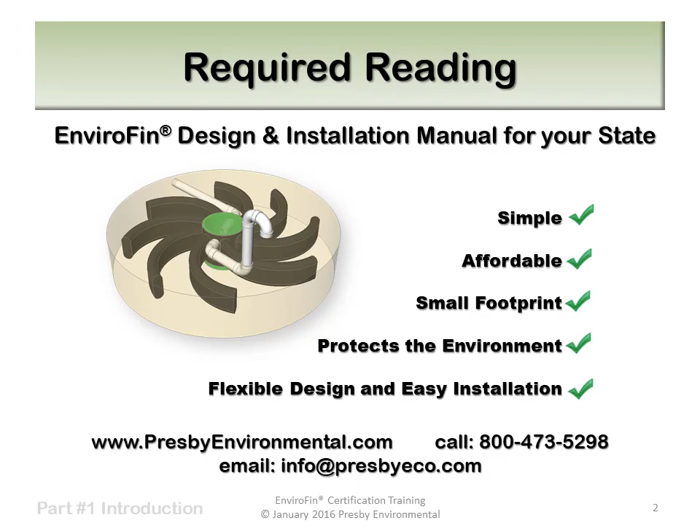Certification topics are divided into 4 parts. The first is a general introduction to EnviroFin. Then we'll investigate the bed configurations available to the designer, which include both rectangular and circular layouts. Next, we'll look at how EnviroFin can be configured in multiple levels for very difficult sites, and we'll finish by describing how to properly assemble and install EnviroFin beds.

Let's start with the introduction.

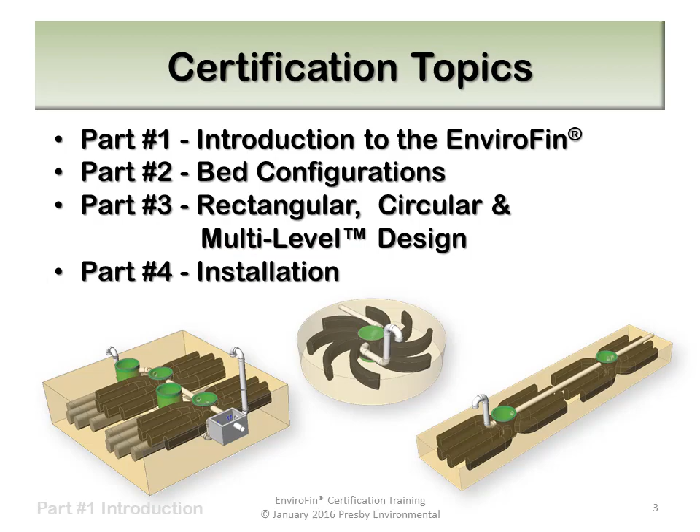EnviroFin is a continuation in the evolution of Presby wastewater treatment products and uses new methods for treatment and dispersal. Wastewater is delivered to a central distribution unit, which allows the surrounding treatment fins to accept, process, and disperse effluent to the surrounding system sand.

EnviroFin has been certified to the rigorous testing standards of NSF 40 Class 1. This proves EnviroFin will treat wastewater to the same or higher treatment levels of mechanical devices, while requiring no pumps or costly maintenance contracts.

EnviroFin may be used in both residential and commercial applications. For higher strength wastewater, contact Presby Environmental's technical support for sizing recommendations.

Like the EnviroSeptic family of systems, EnviroFin offers many flexible configurations to deal with site-specific issues. You'll find EnviroFin's footprint to be the smallest of the Presby treatment products. It also offers the same ease of installation you've come to expect from Presby systems. All this should mean less cost to the user without ever sacrificing the environment.

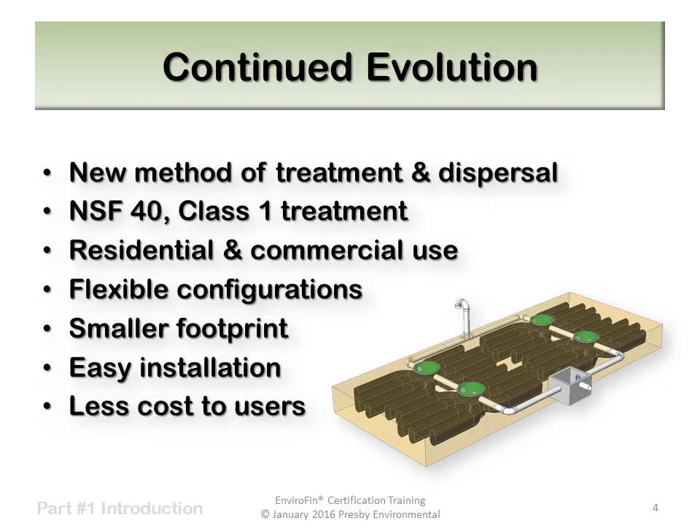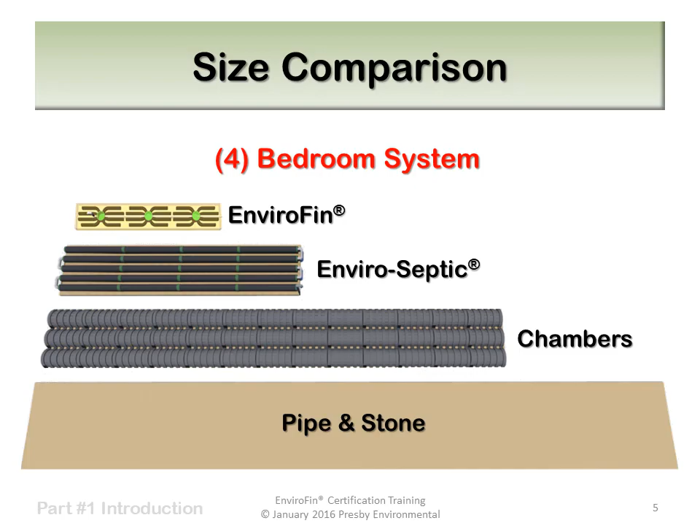A quick size comparison shows EnviroFin to be configured in a very compact footprint. It provides the most efficient use of sandbed area, being approximately 50% the size of EnviroSeptic beds, and as small as 1/10 the size of a traditional pipe and stone system. All this while providing the same level of wastewater treatment as the full-sized EnviroSeptic fields.

Like all Presby systems, EnviroFin is designed to accept pre-treated wastewater from an adequately sized septic tank. Your state or local rules will provide the minimum necessary tank volume based on your daily design flow.

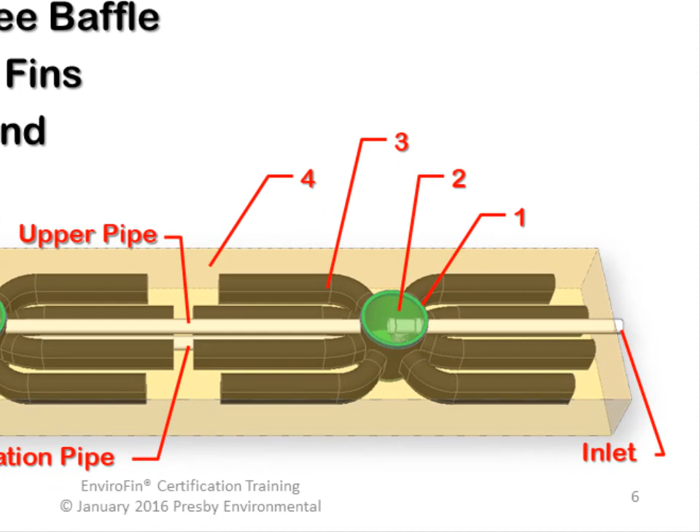All EnviroFin systems have 4 major components. Pictured is a typical system where 2 or more EnviroFin units will be connected in series. A single EnviroFin module consists of a fin distribution unit, what you'll hear me refer to as an FDU for short, which is a green plastic basin that is perforated to allow wastewater to be distributed to the 8 treatment fins surrounding each FDU. Each FDU is supplied with a cover, which is meant to be secured with screws after installation.

Inside the first FDU is what we call a sanitary T-baffle. This directs water downward as it is delivered to the basin. This baffle functions like the baffles in an ordinary septic tank. The sanitary T provides the means to allow gases and air from the field to flow through the septic tank and up the roof stack. This helps to maintain an aerobic environment within the system.

Each EnviroFin unit will be supplied with 8 treatment fins, which are attached to the FDU with zip ties. The treatment fins are approximately 4 feet long and are very flexible. They can be arranged in a very compact configuration as shown, or the fins can extend straight out from the FDU.

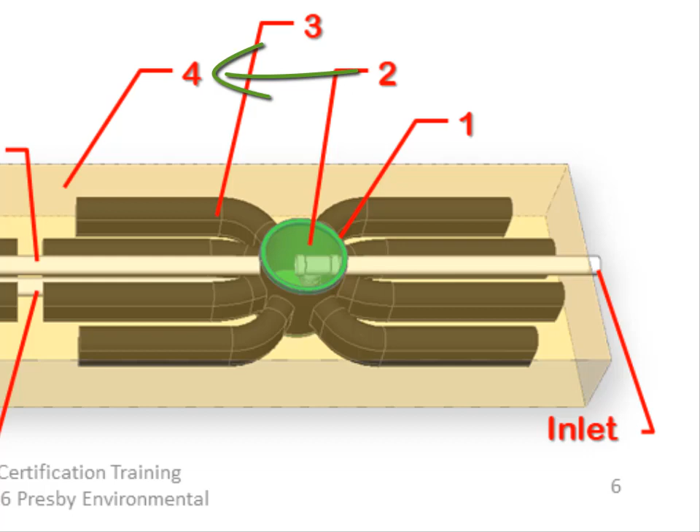Like the EnviroSeptic pipe, EnviroFin units are surrounded by coarse clean sand, what the manual refers to as system sand. This material must meet specific size requirements, which are detailed in your manual. At least 6 inches of system sand will be placed below, beyond, and between all treatment fins. However, only 3 inches of system sand is required over the top of the fins. This will provide a total sand bed height of at least 21 inches.

To ensure all EnviroSystems operate aerobically, venting is required. A vent is attached to the end of each series of EnviroFin units. Vents may be manifolded together when a terraced or stepped bed configuration places EnviroFin units at different elevations. This will be discussed in a later presentation.

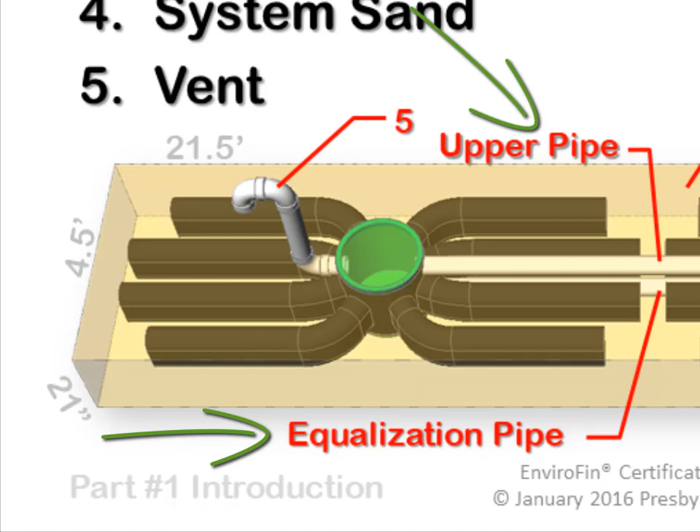Each FDU in a series will be connected by an upper and lower pipe. The upper connection is meant for venting, while the lower pipe, called the equalization pipe, delivers liquid to each FDU in the series. This allows the liquid level in all the FDUs connected in a series to rise and fall uniformly, providing even distribution the entire length of the bed.

Let's take a closer look at the fin distribution unit.

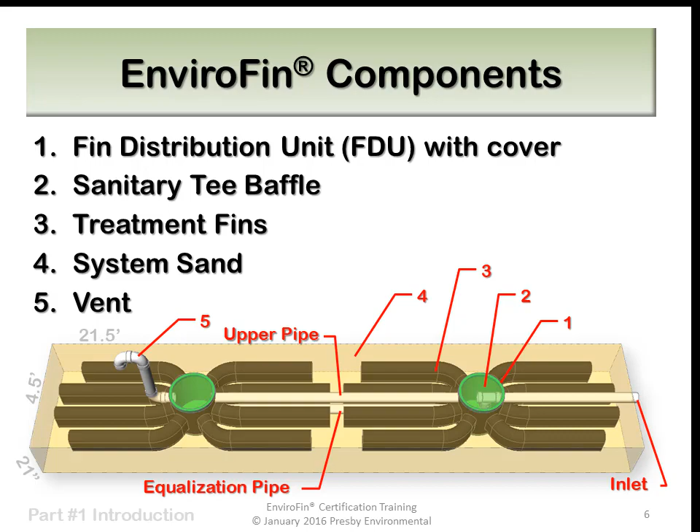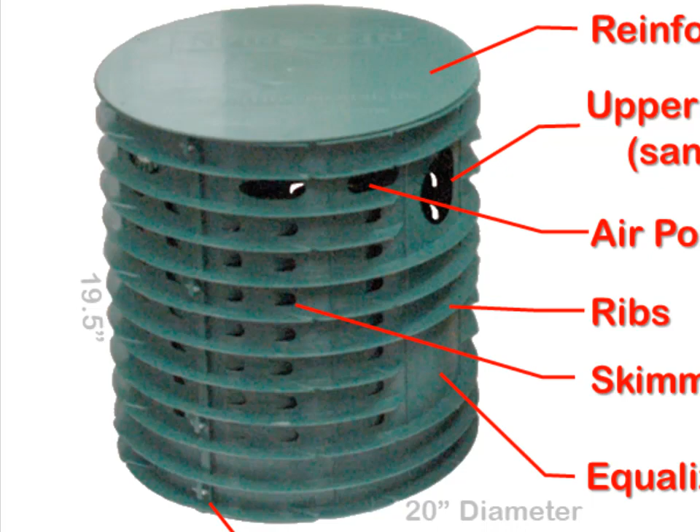Inspecting the FDU shows that it consists of 2 identical halves screwed together along with a reinforced cover. Each FDU half is provided with an opening near the top. This opening has sand-tight fingers that grip the pipe firmly, and will accept up to a 4-inch diameter Schedule 40 pipe.

The FDU also has smaller openings to provide a means for air and liquid to flow into the treatment fins. The reinforcing ribs create channels for liquid to travel the FDU's entire circumference and allow the wastewater easy access to all the fins. Skimmer tabs have been incorporated into the smaller openings, which provide a means of protecting the outlets from allowing larger materials from blocking the holes, exactly the same way as it operates in the EnviroSeptic pipe.

9 inches below the upper connection hole is a cutout for the equalization pipe. A hole saw will be necessary to make this opening, and it should be sized to provide the closest fit to the outside diameter of the pipe being used. The assembled FDU is 20 inches in diameter and approximately 19.5 inches tall.

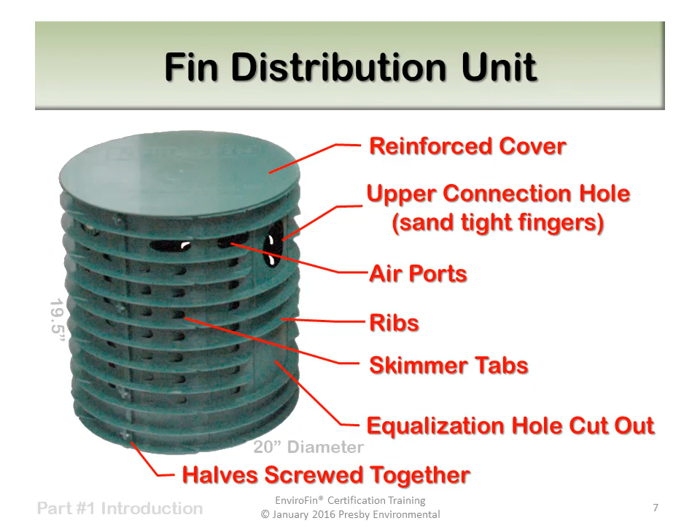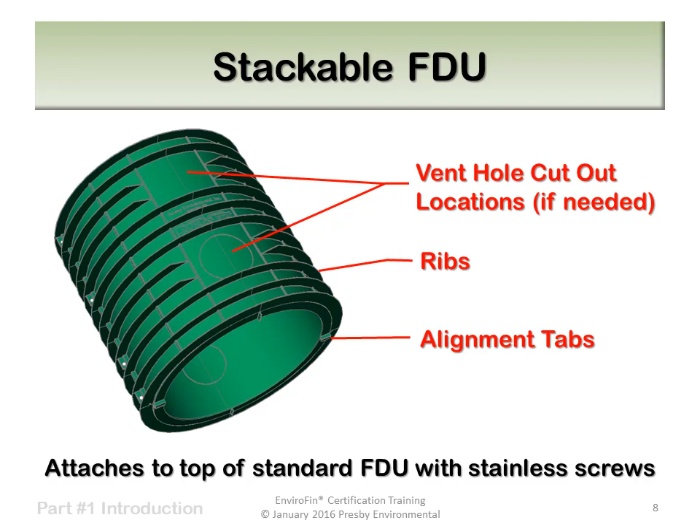When constructing multi-level systems, the lower level FDUs will be 18 inches further below grade than the upper level FDUs. This requires a riser be attached to the top of the lower level FDU. This riser is called a stackable FDU and has no holes other than an open top and bottom.

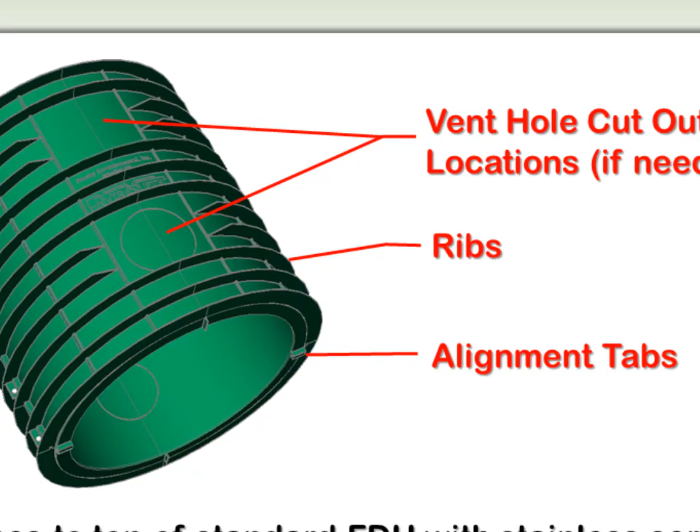Stackable FDUs are provided with alignment tabs along the bottom edge to properly mate with the top of the lower FDU. The stackable FDU is then joined to the lower FDU by means of screws.

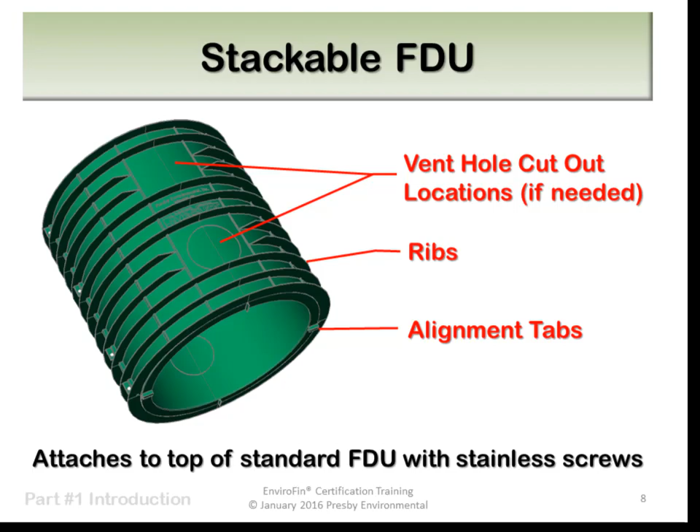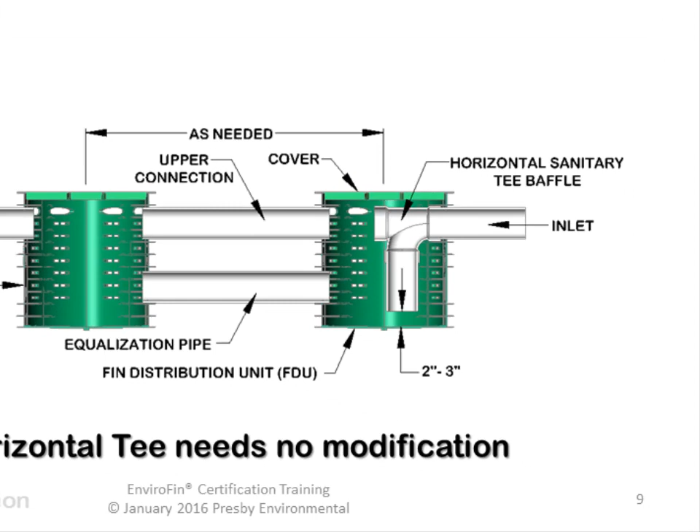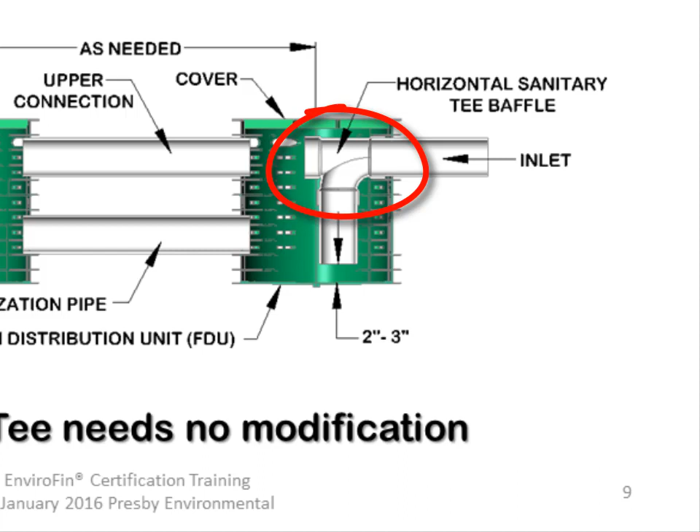This is a section view showing the sanitary T-baffle and other connections between two FDUs connected in series. Unlike a traditional sanitary T-baffle often used in a septic tank, the sanitary T is assembled with the top of the T directed toward the upper connection pipe. This is called the horizontal orientation of the sanitary T, or simply a horizontal sanitary T.

As shown, the radius portion of the T is directed downward. The bottom of the baffle must extend to within 2 to 3 inches of the bottom of the FDU. The upper connection and equalization pipes must extend 1 to 2 inches into each FDU.

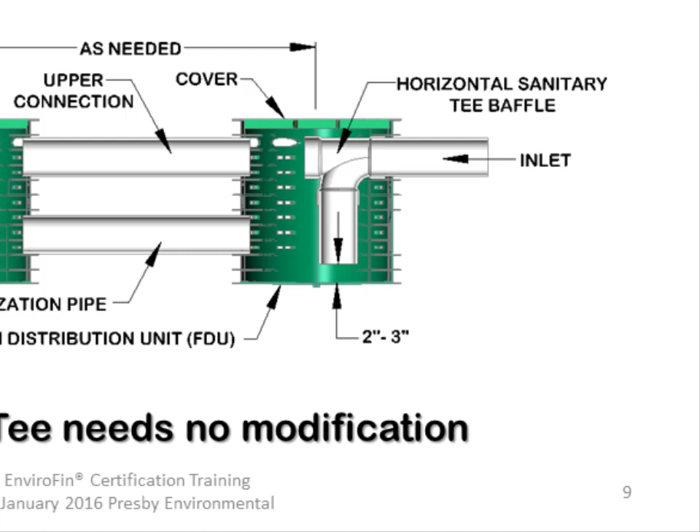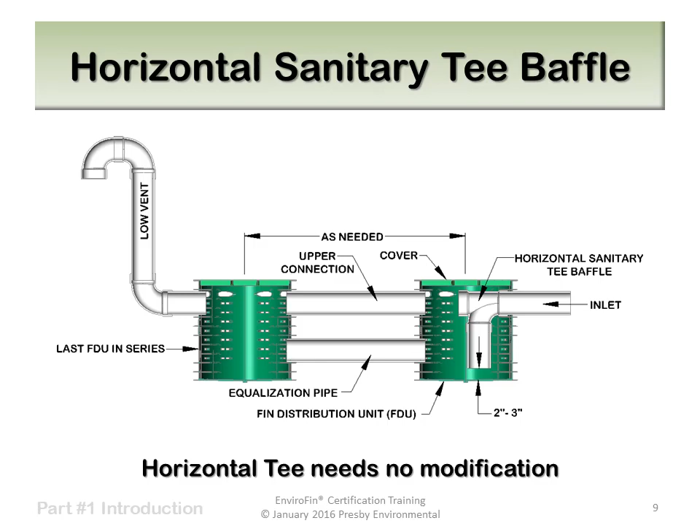All plastic piping is 4 inches in diameter and should not be less than SDR 35 in strength. Schedule 40 PVC is preferred. All plastic pipe joints must be glued or mechanically fastened. It is not necessary to screw the piping to the FDUs. And finally, a low vent must be attached to the last FDU in the series.

As mentioned earlier, the method of liquid distribution starts with the FDU. Liquid flowing into the FDU is evenly distributed to all downstream FDUs, which then allows the liquid to flow into all the treatment fins simultaneously.

Even when a distribution box is used to divide flow to multiple rows or levels of EnviroFin units, this concept of even distribution and uniform liquid level is maintained. The sand bed area surrounding the EnviroFin units is used to evenly disperse the treated liquid to the underlying native soils. This provides a controlled release of water to the ground.

The EnviroFin units themselves provide all the necessary wastewater treatment, while the sand provides the dispersal. This is why the sand bed area is sized in accordance with the permeability of the underlying soils, while the number of EnviroFin units is based solely on the daily design flow.

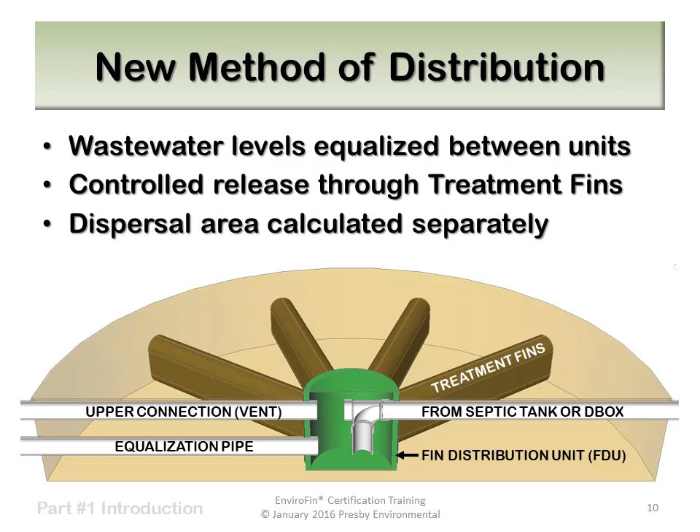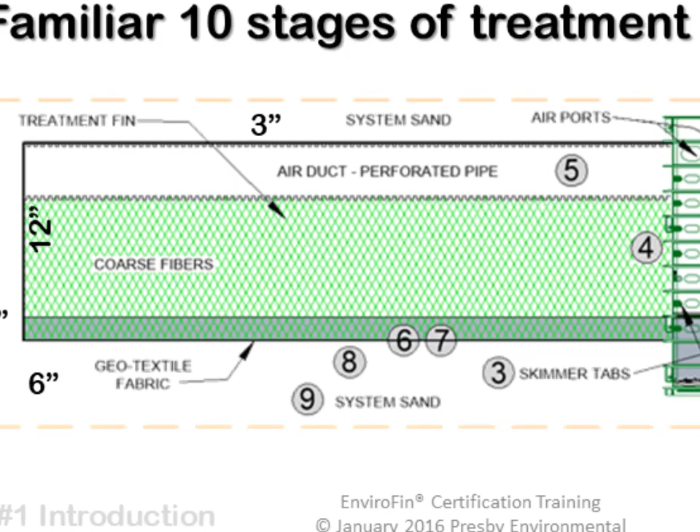A section view of the treatment fin reveals a perforated plastic air duct at the top and the familiar coarse green fibers below it. The 10 steps of wastewater treatment integral to the EnviroSeptic pipe has been retained with EnviroFin. Like EnviroSeptic pipe, the green fiber acts as a coarse filter and provides a very large surface area for bacteria to attach and digest materials in the water.

A strong biomat will be developed in the outer geotextile fabric surrounding the duct and fiber, which will allow a controlled release of liquid to the surrounding system sand. It's important to note that the air duct must always be oriented at the top of the FDU to allow air and waste gases to pass freely into and out of the treatment fins. Please consult the manual for complete details on the 10 stages of treatment.

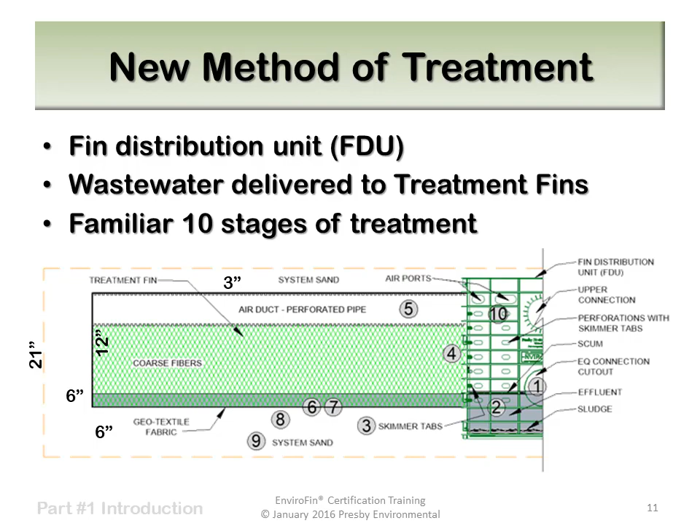Treatment fins are manufactured in sets of 4, meaning 4 fins will be connected together as an assembly. There is a sewn seam along the top and bottom of each fin. Additional fabric is supplied at the beginning and ends of each set of 4 to provide enough material to wrap around a portion of the FDU for attachment.

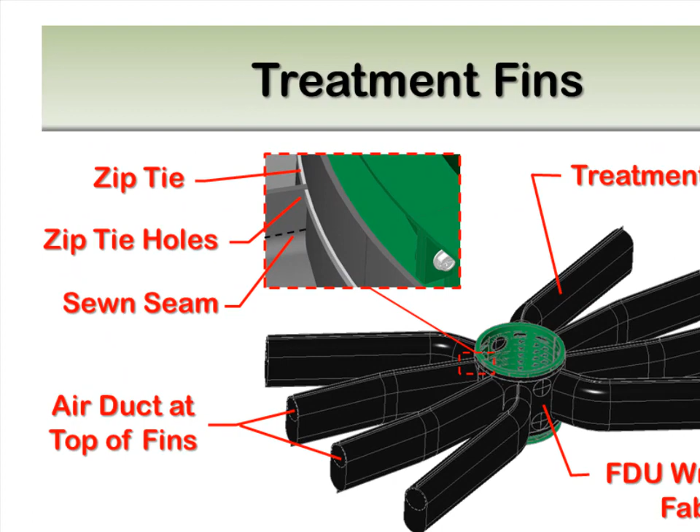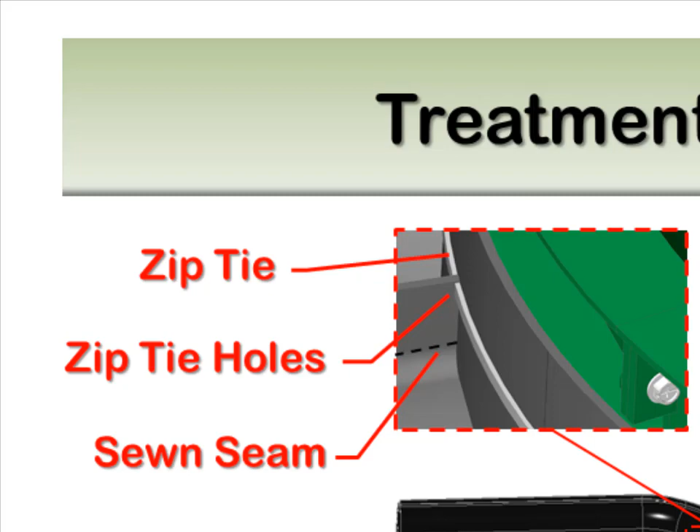2 sets of 4 fins are required per EnviroFin unit, providing a total of 8 treatment fins. In the top and bottom of each fin's sewn seams, small holes have been provided for threading zip ties, which will be used to tightly fasten the treatment fins against the FDU.

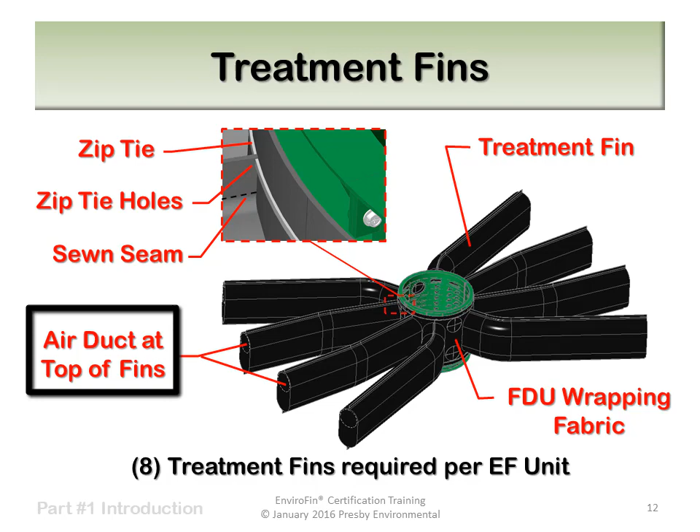It's important to point out again that the air duct within the fins must always be oriented to the top of the FDU.

As we mentioned earlier, with an EnviroFin system, the EnviroFin units will provide the necessary wastewater treatment, and the system sands surrounding the units will provide the necessary dispersal of that treated wastewater to the underlying native soils. Both the number of EnviroFin units and the sandbed area required depend on the volume of liquid they are asked to treat and the nature of the underlying soils.

The sandbed area will be dependent on the permeability of the underlying soils, while the number of EnviroFin units will be based on the daily design flow. For example, a 2-bedroom EnviroFin system placed on poor soils will have a larger sandbed area than the same system placed on good soils. However, in both cases, the number of EnviroFin units will remain the same because the daily design flow also remains the same.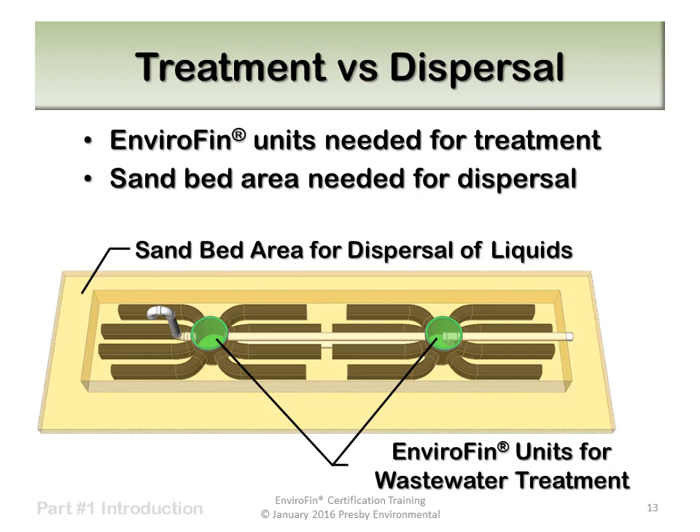If the soils are very permeable, this may provide enough dispersal area to allow the treated effluent to easily enter the subsoils without ponding in the bed. If the soils are poor, it will often require a larger sandbed area than the treatment area will provide. If this is the case, the additional sandbed area need only be 6 inches thick and is referred to as the system sand extension. Keep in mind, the dispersal area includes the treatment area.

Each EnviroFin unit is designed to adequately treat residential strength wastewater for up to 1.5 bedrooms. When designing for commercial applications, use 225 gallons per day per unit to determine the minimum number of EnviroFin units required. When performing this calculation, fractional answers must be rounded up to the nearest whole number.

For example, if we have a 3-bedroom residence, the number of EnviroFin units required will be 2. This is found by dividing 3 by 1.5.

As another example, if we have a commercial system with a daily design flow of 600 gallons per day, we would need 3 EnviroFin units. Notice, dividing 600 gallons per day by 225 results in a fractional answer, 2.7, so it is necessary to round up to 3 whole units required. For most residential systems, these calculations have been done for you and can be found in Table A.

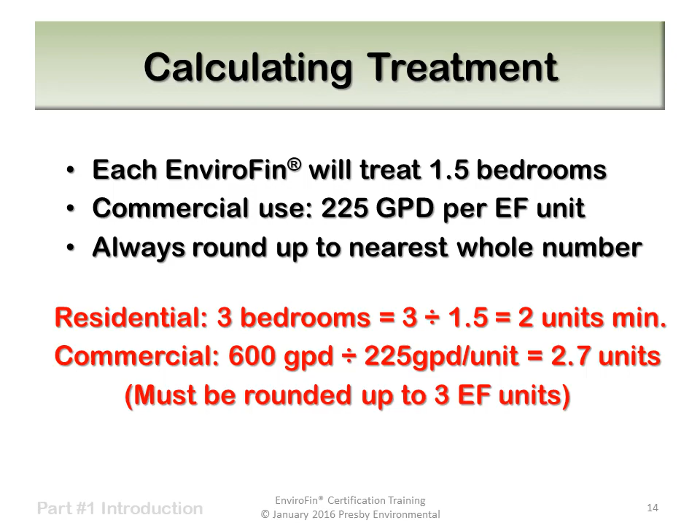As mentioned earlier, the system sandbed area, or dispersal area, is based on the underlying soil's permeability and is given in gallons per day per square foot. This number represents the volume of clean liquid the soil will accept per square foot in a 24-hour period. To find the required size of the sandbed area, we would divide the daily design flow in gallons per day by the soil's loading rate in gallons per day per square foot.

In your state or local manual, Table A provides the required sandbed area for up to 7 bedrooms. It also provides the required sandbed area per 100 gallons per day of commercial flow. This should eliminate the need to perform longhand calculations for most systems.

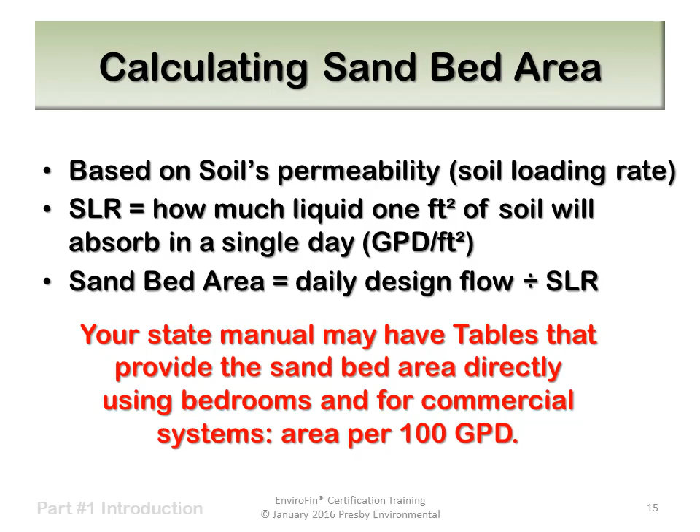That brings us to the end of our introduction. Let's summarize what we discussed in Part 1. The EnviroFin system is the evolution of the EnviroSeptic family of products and provides the same levels of treatment.

As verified by its NSF 40 Class 1 certification, the EnviroFin bed can provide a treatment system that is significantly smaller in size than a conventional pipe and stone fill, while continuing to protect the environment. This should result in lower costs to your customers.

The EnviroFin system has 5 major components: the fin distribution unit, or FDU, the sanitary T-baffle, the 8 treatment fins, the system sands surrounding all the fins, and finally the venting required for all systems.

We showed how the EnviroSeptic 10-step wastewater treatment process has been retained with EnviroFin. With EnviroFin, separating treatment needs from dispersal was introduced, and methods for calculating both were also presented. Before we close, a final reminder to read the EnviroFin manual for your area. The manual covers many more topics and in much more detail than have been discussed in this or future presentations.